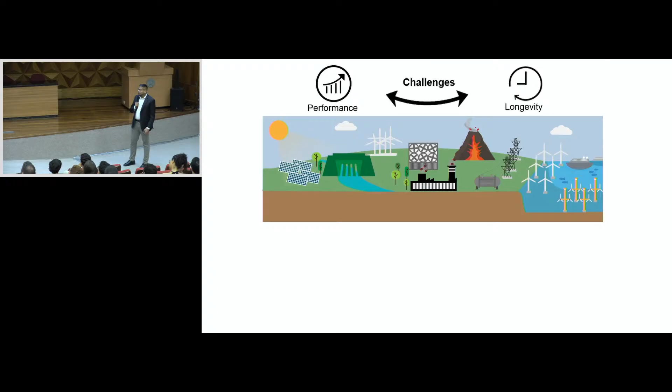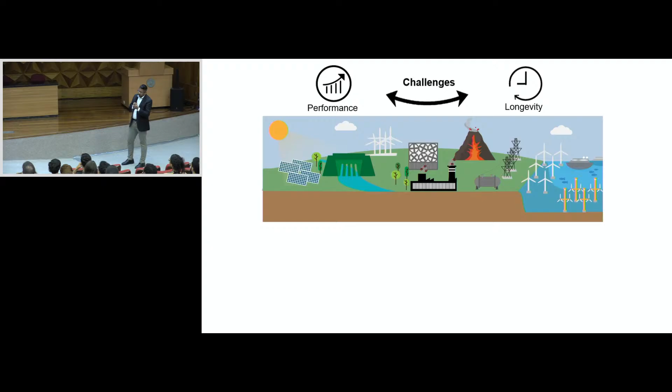So picture this. This here is the sustainable energy landscape. It's kind of like the dream we all have, right? Eventually, no fossil fuels, all of these different systems, they're powering our clean economy. But as you see, you can't only have one thing at a time. You can't have only solar, you can't have only wind, you need everything. And this is an engineering conference, right? As engineers, what you all like to do is think about performance and longevity. For performance, you're asking questions like, how efficient is this conversion process? And for longevity, you're asking, well, how far can this take me? If I have something out there in the ocean, is it going to serve for 20, 30, even maybe 50 years? So that's the fundamental focus of my research group.

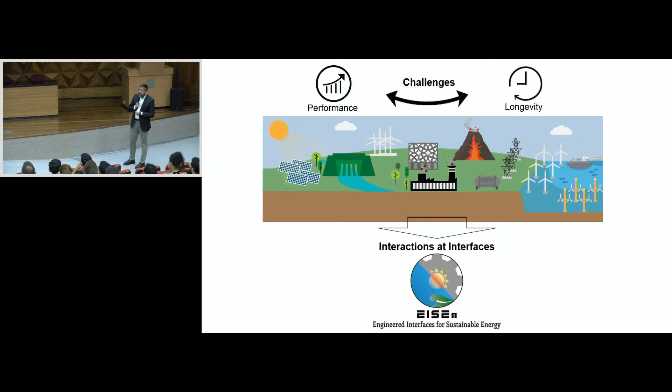It's that we feel that a lot of the challenges in these systems happen at interfaces, which are boundaries between materials. And just before I start the presentation, I like to do a bit of theory so we're all on the same page. So bear with me as I go through this.

What exactly is an interface? What exactly is a surface? First of all, a bulk phase is matter in 3D space. So right now, the atmosphere around us, you can think of that as bulk phase. An interface is defined as a boundary between two or more materials. But specifically, a surface is a type of interface where you have a solid-gas or liquid-gas boundary. As an example in this photo, this is in Vancouver. My definition of a beach has changed since I've been in Brazil, so that's why I call it that - doesn't compare to the beautiful beaches you have here. So some interfaces you see: there's a solid-liquid interface, which is the oil tanker with the ocean, and many more interfaces there. Can we have a gas-gas interface? That's a question for you all to think about. If you think there is, catch me after my presentation.

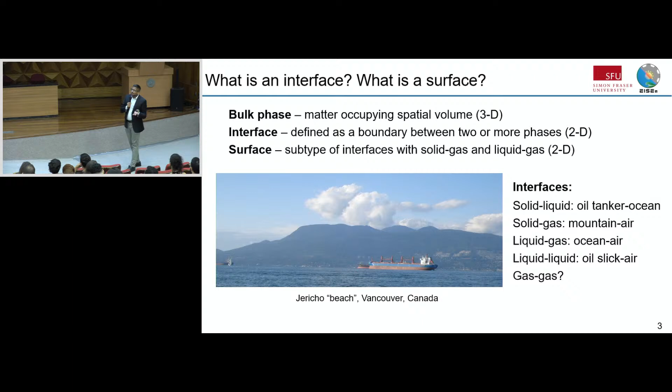So interfacial science and engineering are two distinct concepts. I like to quote this from Dr. Wolfgang Pauli. As you're noticing, the Nobel Prizes are being announced this week - Wolfgang Pauli won the Nobel Prize for physics. But in his lecture, he said something very interesting: God made the bulk, but the devil made the interface. So we like to call it another exclusion principle from him.

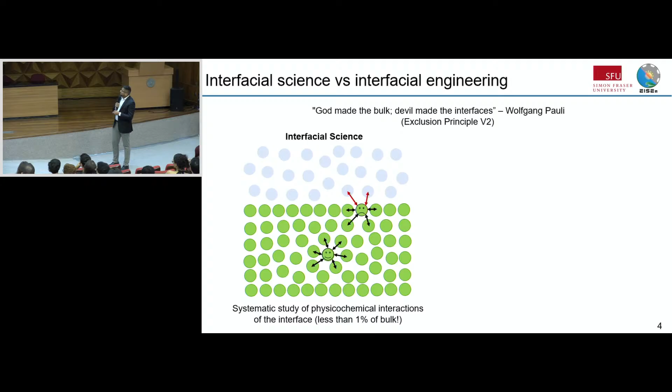So the way it manifests itself in science for interfaces is the boundary between materials. If you're a green molecule inside, you're happy because you're surrounded by your own friends. But if you're up there at the interface, like that unhappy molecule, then there are different intermolecular forces of attraction compared to the bulk. So just by that definition, the interface is where a lot of challenges happen. And if you think about it, this little boundary is less than 1% of the overall material, but it can be really, really bad, unfortunately, in terms of challenges. So that's where engineers come in.

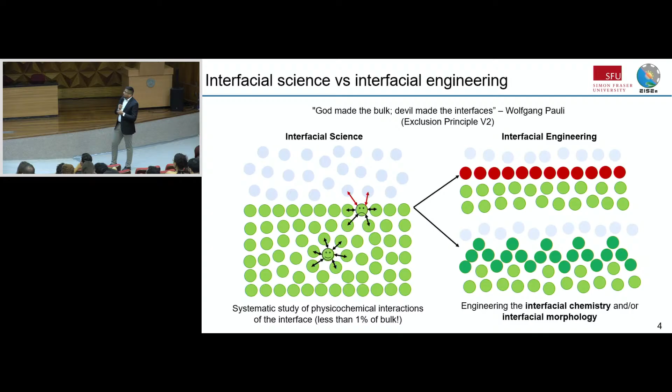You start asking questions: what can we do to make that unhappy molecule happy? A couple of things you can do is replace it with some sort of intermediate layer, where you now have this bond between the two phases. Or you can also make hills and valleys, changing the morphology. So really, these two options are exhaustively the only options you can do with an interface: either change the chemistry or change the morphology.

So let's keep that in mind as I go through my talk. A couple more theory concepts, and then I'll dive into the research, I promise.

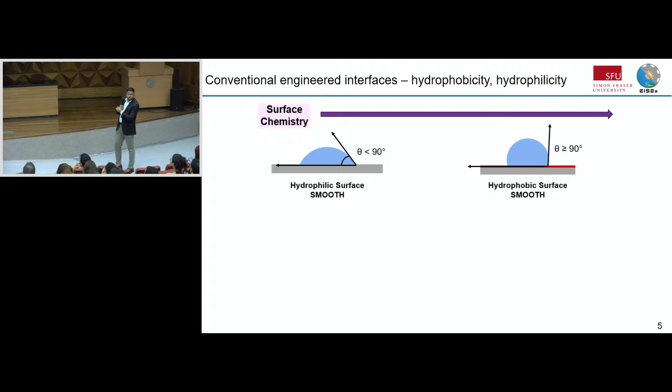The first thing is hydrophobic and hydrophilic materials. Looking at surface chemistry as one lever, you can have two types of surfaces: a hydrophilic surface or a hydrophobic surface, defined by the contact angle. If the contact angle is less than 90, it's hydrophilic; if greater than 90, it's hydrophobic. A good example is a non-stick pan, where the coating makes a hydrophilic material like steel hydrophobic.

But now this is where texture comes in. Remember the hills and valleys I mentioned? If you take that smooth material and add hills and valleys, or microtexture it, the contact angle becomes 0, meaning you get extra wettability. The same thing happens with hydrophobicity: if you texture it, you make it extra hydrophobic.

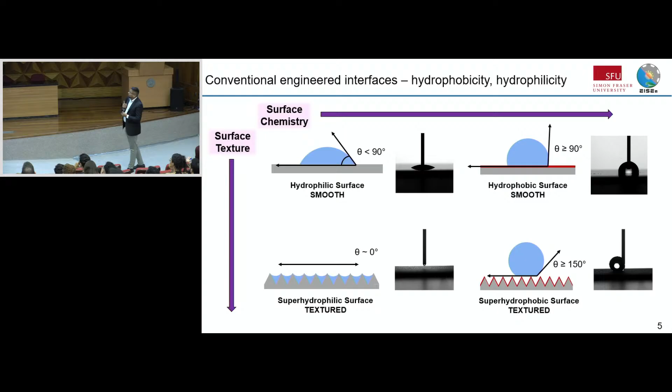Good old school steel, iron—you're going to get more sticking, but that's okay. It's more crisper.

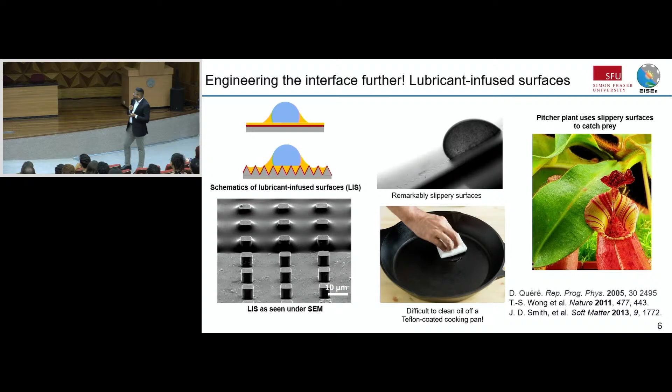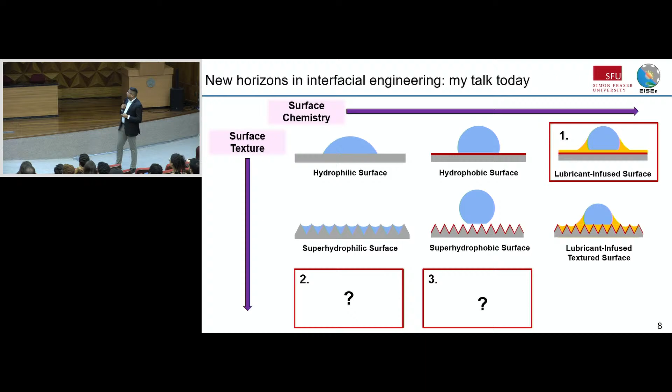What we're interested in my group is how do we bend the horizon, or look at new directions in the research? This is where lubricant-infused surfaces come in, and I'll talk about that in my work shortly. We're also looking at some more horizons, which I'll keep as a surprise for the end. Essentially, that gives a structure for my research side of the presentation—that's all the theory. The research side will be covering these three topics.

Okay, so back to the sustainable energy system. The first part I'll talk about is how we use these lubricant-infused surfaces to enhance the longevity of hydrogen infrastructure.

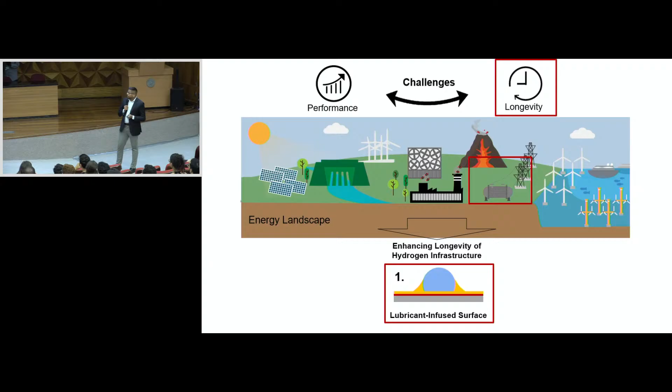Hydrogen is quite big in Canada, and I believe it's also growing. The momentum is growing here in Brazil too. The idea is that when you burn hydrogen, you only get water. It's clean, and you can transport it instead of natural gas.

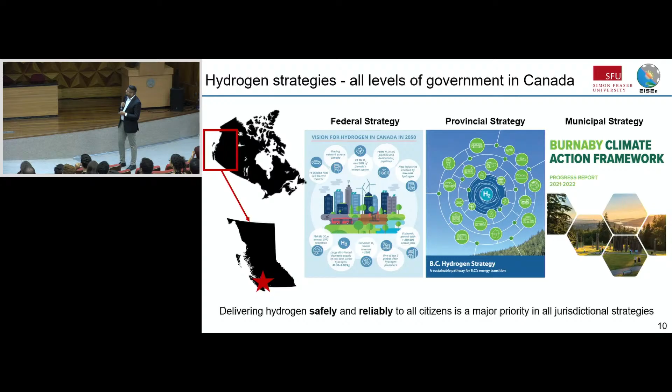Different levels of government in Canada have started making different hydrogen strategies. But if you look at the wording of these documents, it always says you need to deliver hydrogen safely and reliably. So that begs the question: how safe is hydrogen? We all learn in textbooks that if you burn hydrogen it's very clean, you just get water. But is it actually really safe?

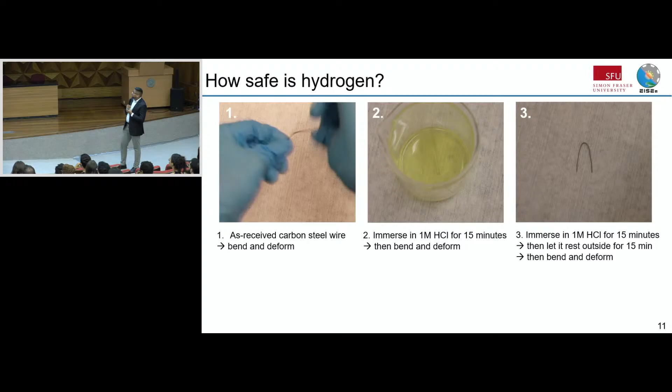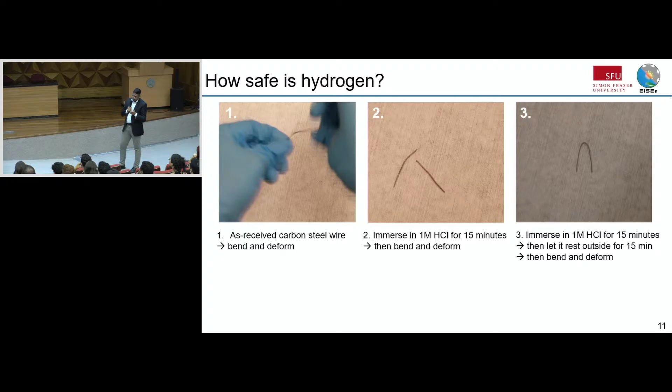Now if you place that same steel wire in hydrochloric acid and let it sit there for 15 minutes, as you saw in that video, there are bubbles evolving because hydrochloric acid is corrosive. So then when you put that same wire through the same bending test, you'll see that it breaks, and nothing else was done. It was the same wire, you put it in acid for 15 minutes, and it lost its strength. So you might think it's probably corrosion eating up the metal.

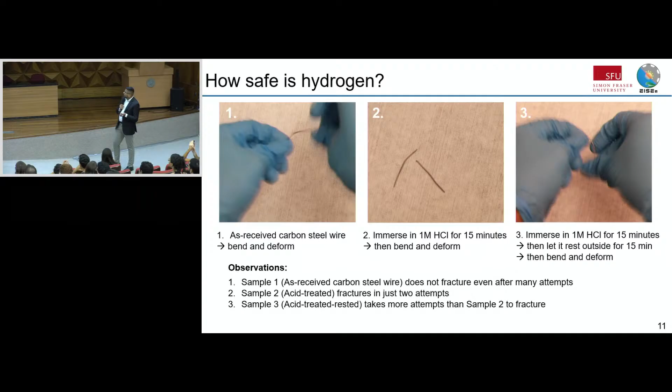That's true, but then this interesting thing happens. If you take the hydrochloric acid and let the wire sit outside for 15 minutes, then do that test again, you see that it's not breaking. In this video here, it broke in just 2 attempts. Here, it's not breaking - that means it's regained its strength. If it was corrosion, this wouldn't happen, because corrosion is permanent. So to summarize the observation: the first video doesn't fracture, the second one fractures right away, and the third one takes many attempts to fracture.

What this is called is hydrogen embrittlement. Some of you may have heard of it and will see topics here relevant to what you worked on. If you haven't, please pay close attention, because this is a big safety hazard that affects hydrogen systems. So how exactly does hydrogen embrittlement occur?

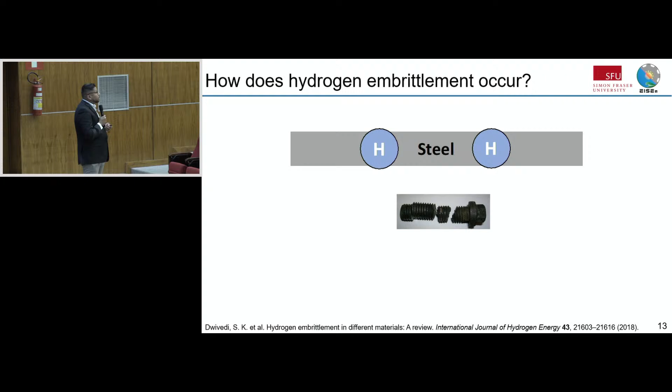Well, hydrogen is atomic number 1, a very tiny molecule. When it meets steel, it can dissociate into atoms, and then it can enter the steel because the hydrogen atom is tiny - it's just got one electron and one proton. Once it goes in, the steel becomes very unpredictable. It's like gaps have come into the steel, and then the steel can break this way.

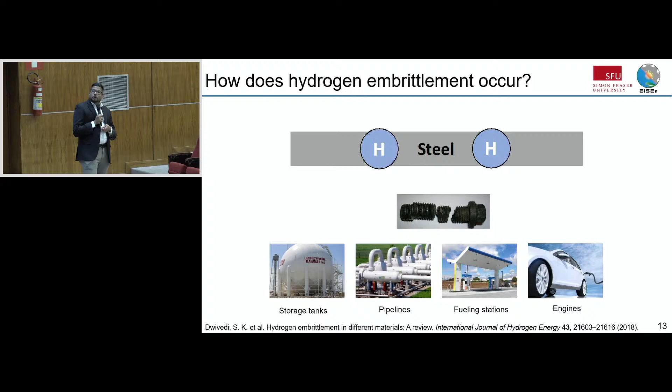If this doesn't scare you, know that this is a real problem, because as we're developing hydrogen infrastructure around the world - storage tanks, pipelines, fueling stations - you don't want this kind of thing to happen. You want to deliver hydrogen safely to all citizens.

This is where some of the research I did in grad school, combined with my first year in my faculty career, comes in - what can we do about this? If hydrogen is entering into the metal, the natural thing as engineers we think of is how can we stop that. So the hypothesis was: what if we used a coating? That coating is essentially what we call a barrier coating. But in this research, I looked at not just any coating, but a liquid coating.

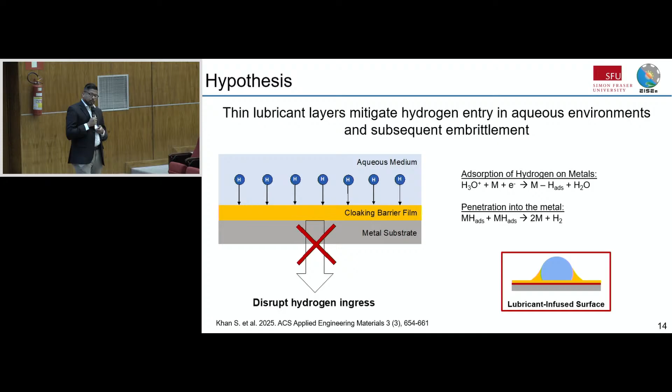This is where lubricant-infused surfaces come in. The specific lubricant we worked with is called Krytox, a fluorinated lubricant that is used as vacuum grease oil.

To show how effective it is, there are three videos. In the first one, you have a hydrogel - as soon as you put it in water, it swells to many times its own volume. In the second video, that hydrogel is coated with a hydrophobic layer, Teflon, and you would expect it would survive in the water, but it's also swelling.

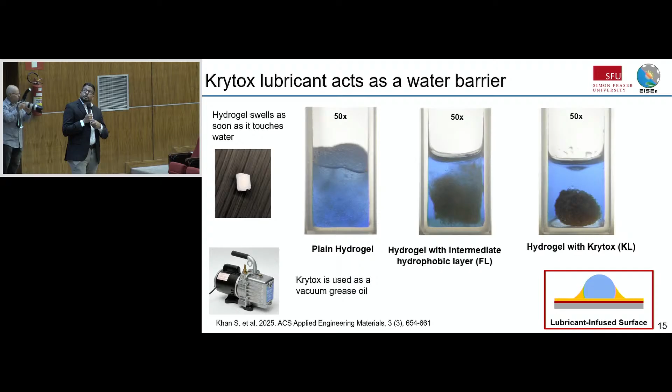A good example of that is your cooking pan - if it has a Teflon layer with a crack or scratch, the cooking pan isn't going to work. So solid coatings have that issue. In the third video, which I promise you is running, nothing is happening - the Krytox layer, which we call KL, that barrier layer, is stopping the corrosive liquid from going inside.

So that video was to show you that these liquid layers can be as thin as 100 nanometers - a thin layer of oil. We showed through rigorous electrochemical experiments that it can slash the hydrogen diffusivity by almost an order of magnitude.

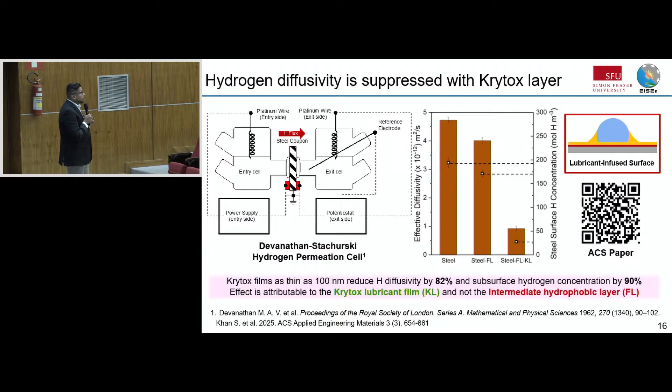The important thing is that this works not just by itself, but along with this intermediate red hydrophobic layer. Just that hydrophobic layer alone isn't enough to do the job. Adding the lubricant makes it even better. I don't have time to go into details here, so feel free to refer to our publication. But in a nutshell, a thin lubricant layer can stop hydrogen diffusion, which has implications for pipelines and storage tanks, helping protect these systems.

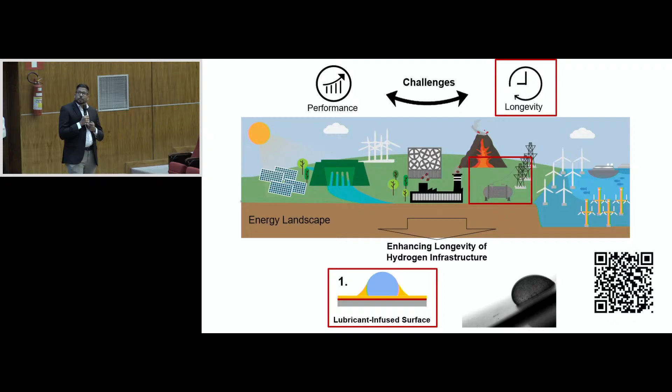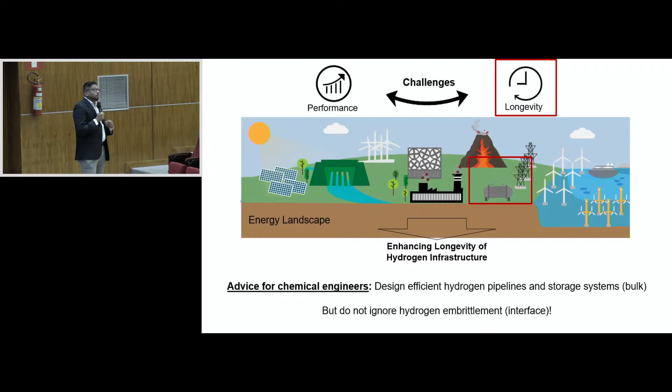So that was the first part of my talk. Since this is a chemical engineering conference, and I'm actually a chemical engineer by background from my undergraduate degree, my advice is: as you design these next generation pipelines, the fluid mechanics and transport are amazing, but don't ignore the interface. Because if that embrittlement causes something to break, hydrogen leaks out and you've got explosion risks.

One of the papers in the QR code looked at whether, once you capture CO2, you can instantly convert it to ethanol. We found that because there's more mass transfer happening rapidly, you can make that reaction faster too.

The second thing one of my students is working on is precipitating CO2 as a carbonate, similar to what shellfish do—taking the CO2 and converting it. My group, and personally myself, don't believe in underground storage. If you disagree, happy to debate, but sending CO2 all the way down, why spend all that effort? It's better to convert it. So definitely the conversion part is a research interest.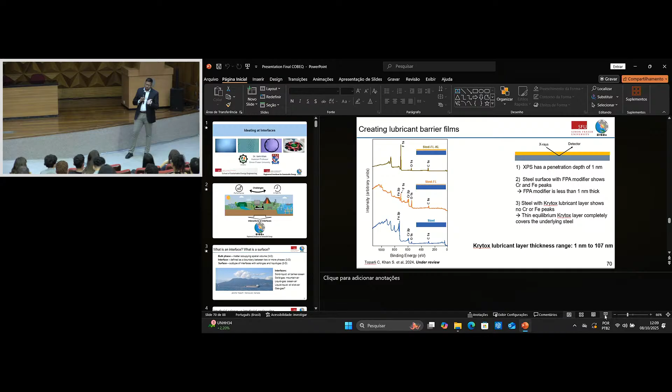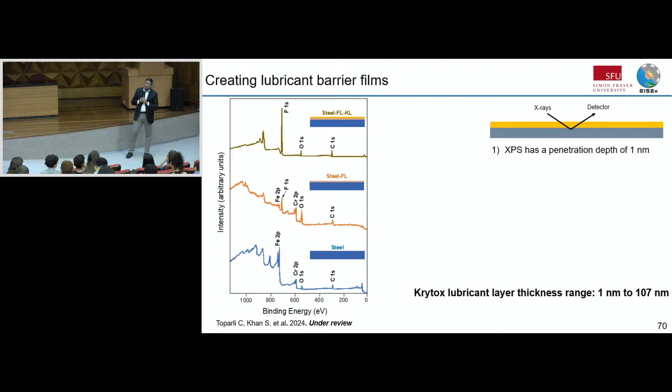Good question. Sandblasting involves high pressure air pushing sand, like in an aquarium setup. What Oz did was use a parallel blasting technique, because if you do it the other way, the glass breaks. It was essentially using abrasion, though quite random. The other option is to use sandpaper to make it rougher. But as long as the sand is very small, it's able to create microtextures.